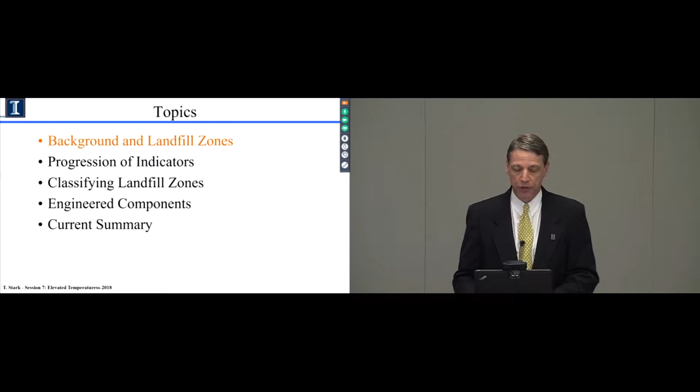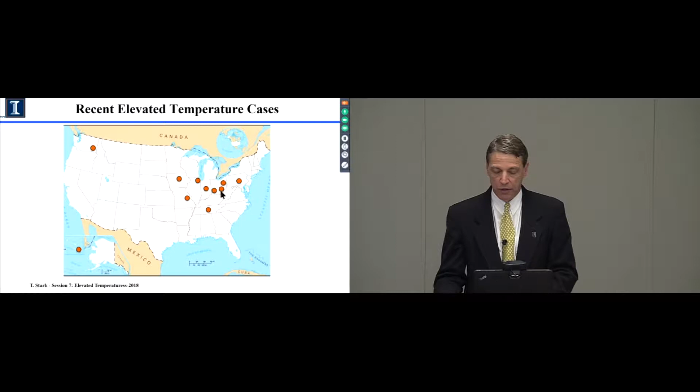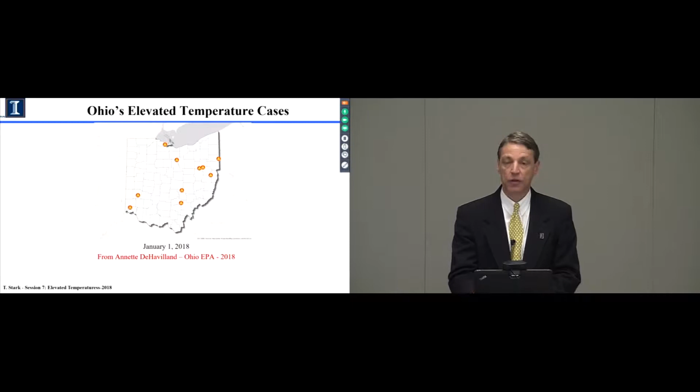The outline of the presentation is: the first topic is background on landfill zones and how big of an issue this is. This is a map I assembled previously that identifies the range of elevated temperatures in the United States, and recently I noted only 3 cases in Ohio, but the Ohio EPA produced a slide showing 10 in the state of Ohio, more than I had on my initial map. So it is a growing problem, elevated temperatures in containment facilities.

So what are some of the typical causes of these elevated temperature events? Some of those are pictured here in various ways. The first is air intrusion. Here's a cover system, and even though it's been repaired, you can see a hole right there in the cover system, the soil interim cover system, allowing air intrusion.

Gas well operations: this is steam or smoke coming through a final geosynthetic cover system on a closed landfill near a gas well operation, which was excavated and remediated. Incinerator ash arrives at the facility usually at an elevated temperature, and that gets confined in the facility and can lead to an elevated temperature event. Industrial waste of different flavors, the pictured one is aluminum production waste, and it could also involve shredded or scrap tires. Finally, C&D, construction and demolition debris type facilities, can also experience these elevated temperature events.

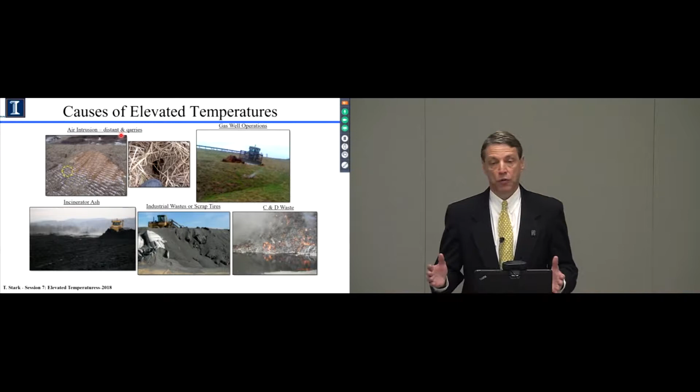I'll focus in on the next couple slides on air intrusion. These sources can be distant, not really close by. The picture I show you is fairly close by, but they can be fairly distant, and thus you're pulling in oxygen from a greater distance.

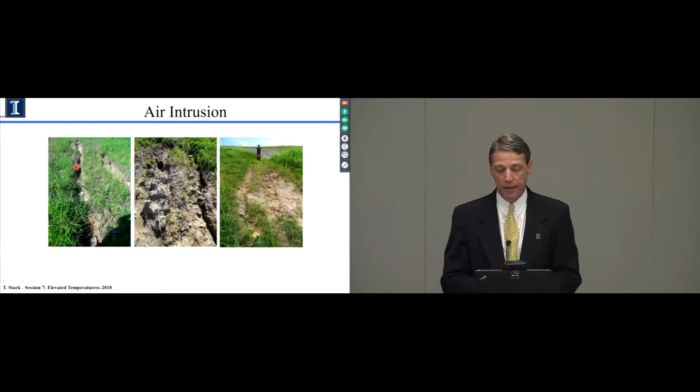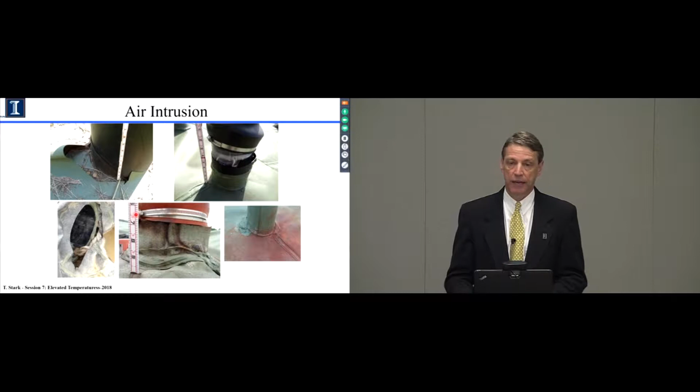Here is some erosion of the interim soil cover, exposing the underlying municipal solid waste, and that is a source of air intrusion. If the facility installs a geomembrane to control odors or just control the facility a little closer, making sure the geosynthetics are tight, and the geomembrane in particular, such as gaps between welds, extrusion welds, penetrations in the geomembrane, etc., is important, because there is a vacuum applied underneath this geomembrane, and if there are defects in that cover geomembrane, that can be a source of air intrusion.

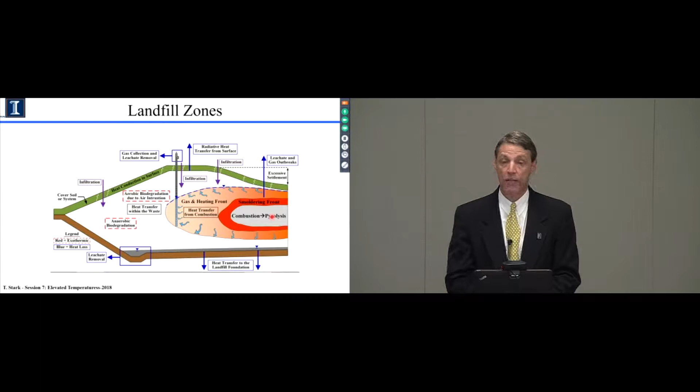So here are the main zones in a landfill experiencing such an event. We have a normal operation zone out in front, then a gas and heating front coming towards the normal material, a smoldering front, and then a post-reaction or combustion-pyrolysis zone behind that. I'll get into the specific features of each of those zones in just a minute.

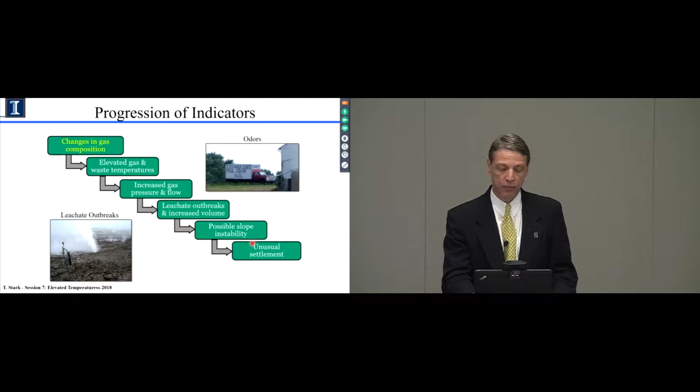So what is the progression of indicators? How do we know the facility is experiencing one of these events? Here is the timeline from the start to the finish of one of these events, with about six steps in this process, and I'll give you a summary of each. Generally, the first step is a change in gas composition, which can be readily detected if the facility is carefully tracking and creating trending graphs for various gases. The top graph is wellhead temperature, measured at the exposed wellhead.

You can see it's trending along fairly consistently below the regulatory value of about 55 degrees C, and then it picks up, as you see here, going forward. As that temperature changes, there are changes in the gas composition within the facility. The bottom plot shows the ratio of methane to carbon dioxide flow rate from a gas extraction well. You can see it's above 1, and 1 or unity is a very good number for that ratio, so it's tracking along above 1. Then notice right about 550 days, when the temperature starts increasing, there's a pretty quick and dramatic drop in this ratio of methane to carbon dioxide.

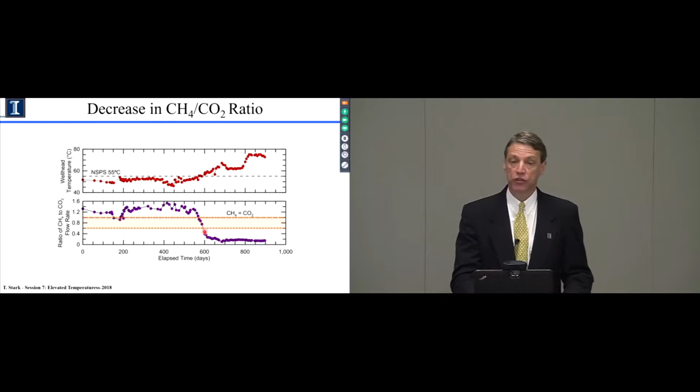Here's another parameter that's a good indicator of the gas front. Here's the graph I showed you on the prior slide of the ratio of methane to carbon dioxide. It's above 1 and then it drops quickly. This range from say 0.6 to 1 is sort of the transition zone, and that's why it's shaded. So below 0.6, there is some kind of reaction or event or significant change in gas composition that's occurring. The bottom graph is the carbon monoxide versus the same time scale at the same facility. You can see very low carbon monoxide up to about the same time as the decrease in the methane to carbon dioxide ratio.

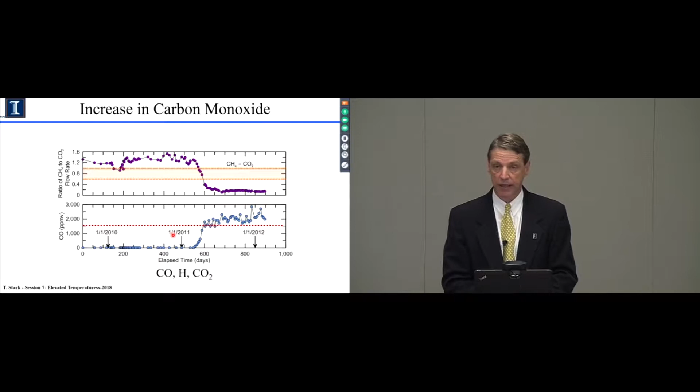Carbon monoxide is a good indicator. It's generally not measured initially, so that would be an additional measurement once you see the change in methane and carbon dioxide. A good number for carbon monoxide is 1500 - that's the red dashed line. Above 1500, that's a good indicator that there has been a significant change in the gas composition for the facility.

Here's some data from a facility experiencing elevated temperatures, and this gives you a picture of how you can track the movement of the elevated temperatures by watching the ratio of methane to carbon dioxide. Here's the graph starting. Notice that borings 1 and 2 are already exhibiting a very low ratio, much lower than unity, so this is an area of concern or reaction that's occurring. But now watch, B1 and 2 are over here on the cross section, and the other borings or wells are at or above 1.0, say about 0.8 to maybe 1.4. So the reaction or the change in gas composition has not occurred in these other borings, wells B3 through B6.

But notice as time progresses, right about here in 2011, there's a distinct drop, and this is in B3, B4, and B5. It drops quickly below unity, so you can see that the reaction has gone from B1 and 2 here on the left side over to 3 and 5 over in this range. So not only does it give you an indicator that an event is occurring, but you can also plot this trend in a plan view across the facility and see the direction of movement.

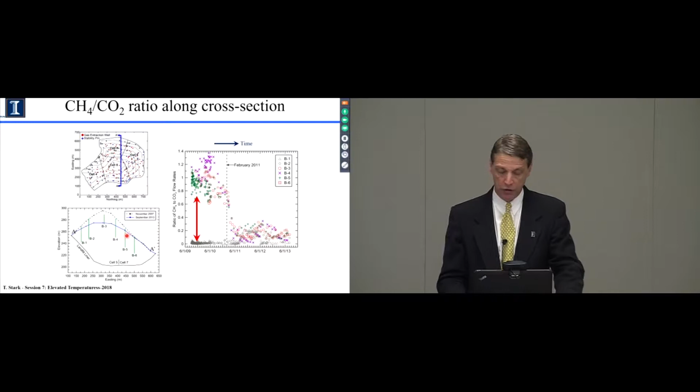That leads us to elevated gas and waste temperatures and the heating front. The wellhead temperatures now can be plotted on a plan view of the facility, and this graph in the upper left is April, December of the same year, so you can see the higher red color is higher temperature. April the following year, one year after the graph above, you can now see some very concentrated temperature zones on the order of 90 to 100 degrees Celsius in the wellhead.

And now in December of that year, it actually looks like it became a little cooler, and that's one problem with using wellhead temperatures - they're subject to ambient air temperature, so as the weather cools, it looks like the landfill is cooling a little bit. One other thing to notice is there are some blue circles here indicating cooler temperatures, but notice that they're very concentrated. What's happening there is the gas wells have a vacuum, cold air is being pulled in, and thus the wellhead temperature is decreasing. So in a plan view plotting wellhead temperatures, you can get a good view of what is happening within the facility.

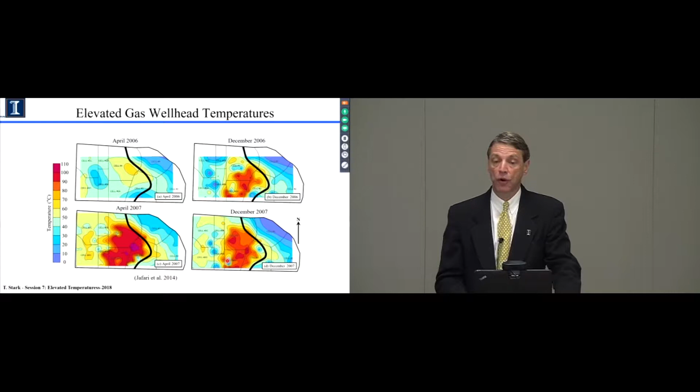And that's a good number if you're going to assess the facility and use wellhead temperatures. You need to add about 30 degrees Fahrenheit to get an estimate of what the downhole or waste temperatures are.

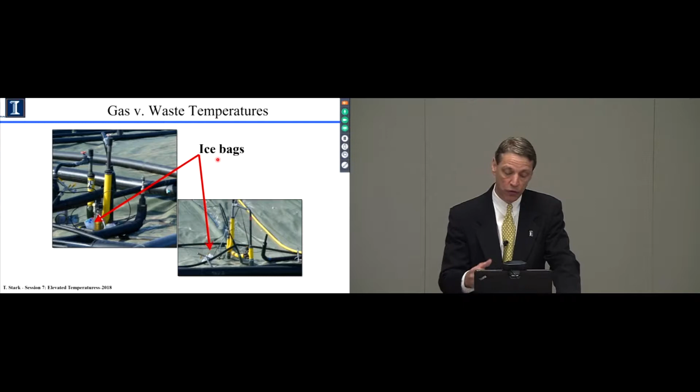Wellhead temperatures can be affected by ambient conditions, as I mentioned. As seasons change, the temperature changes, and it can affect the measurements. Also, the temperatures at the wellhead can be adjusted or controlled on the surface. If you wanted to cool the well to protect the well and the infrastructure, for example, you could put some ice bags on it and cool it down. So there are a lot of ways that the wellhead temperature may not reflect the downhole or waste temperatures.

The next is increased gas. So we've had a change in gas composition, a change or an increase in temperature, and now an increase in gas pressure and flow.

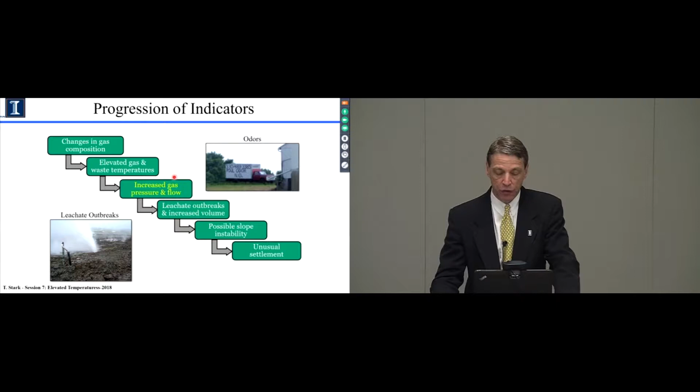So pressures in typical cases, say with biodegradation, a pressure less than 3 kPa. If there's an aluminum production waste reaction, it can be on the order of or as high as 45 kPa. And if there is subsurface smoldering, it can generate a pressure as high as say 75 kPa.

And the reason that pressure is generated is the ideal gas law. Going back to undergraduate chemistry, PV equals nRT. There are a couple other parameters here, but the two big parameters that are important in the equation are capital T, temperature, and on the other side of the equation, P, pressure. So anytime the temperature goes up, the pressure goes up in direct function to it, and that's how high temperatures generate these high pressures.

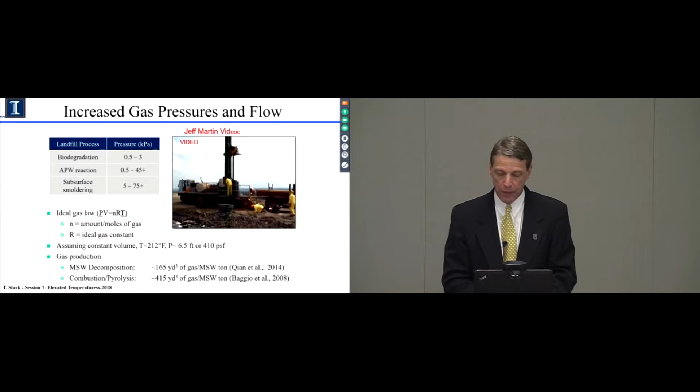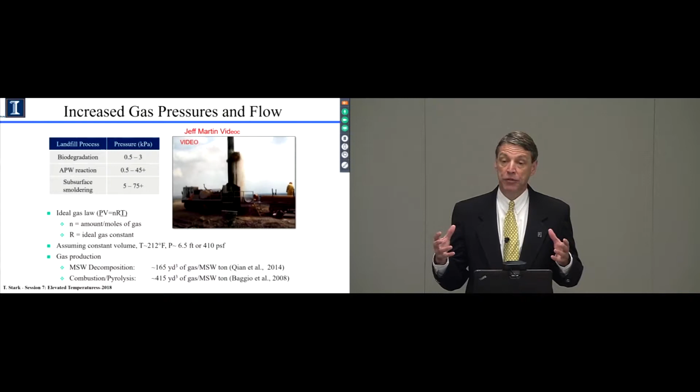So this is the drilling of a gas well, actually a slope inclinometer in a facility, and the drilling process is going, and that is leachate being shot out the top of the boring, on the order of maybe 20 feet high, because the high temperatures generate pressure, shooting the leachate out the top.

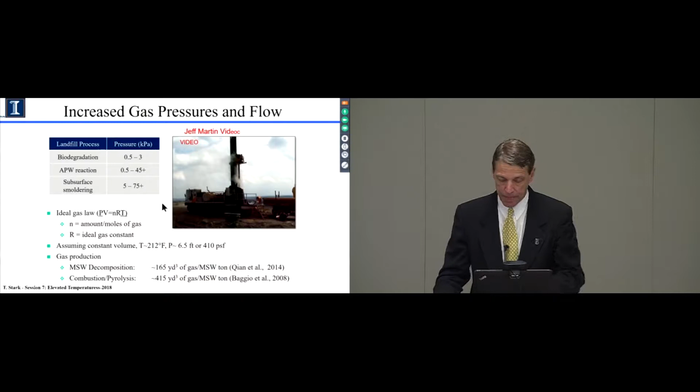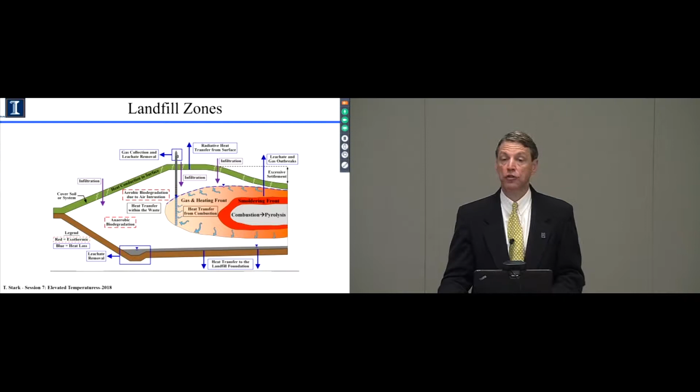Okay, so next is leachate outbreaks and the increased volume of leachate when these elevated temperature events occur. So this is the diagram I started with, illustrating the gas front, heating front, and the smoldering front of the landfill. And as that front moves closer to an exposed slope of the facility, such as here, the condensate or vapor condenses when it reaches the cooler area or the side of the landfill, and that creates a leachate outbreak right in this area.

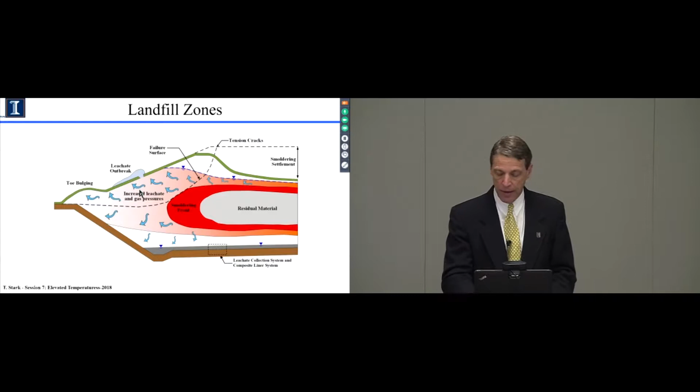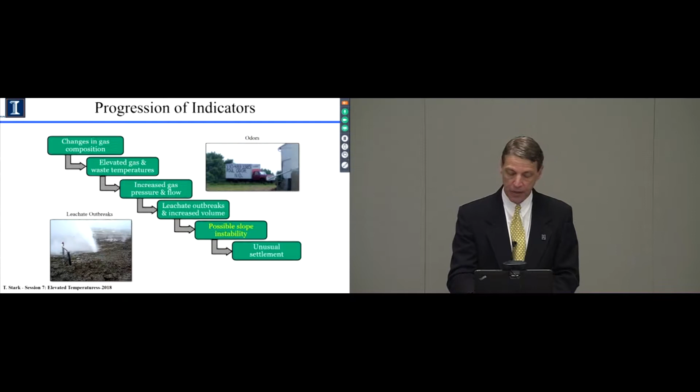It's important to monitor these cracks and make sure they're tension cracks instead of settlement cracks. Generally, the tension crack will reappear in the same location in a short period of time, maybe within a day or so. And if that does occur, that means the slope is moving fairly consistently.

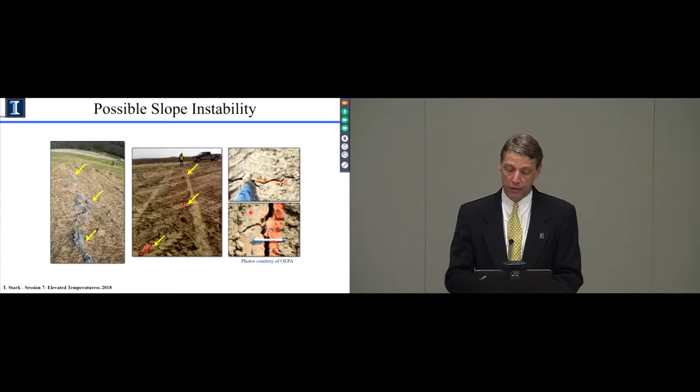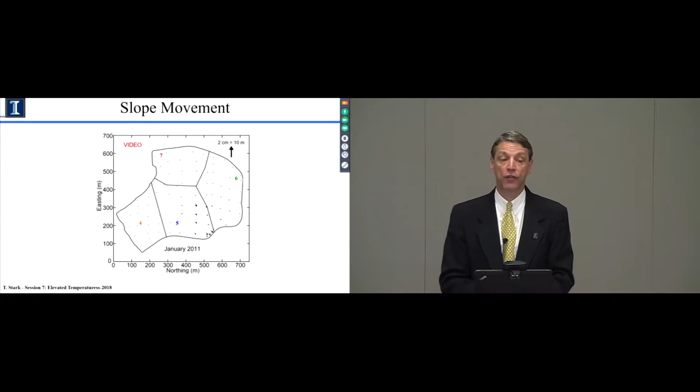So you can see that in this video. The elevated temperatures are going to start in cell 5, where my cursor is, and then migrate to the north into cell 7 and 6. There'll be little vectors that come on the screen that give you an indication of the movement. The longer the vector, the more movement that has occurred.

Okay, so there's July, September. You can see movement of the vectors here in cell 5. Now they're moving up to cell 7, pushing out, 2012, 2013.

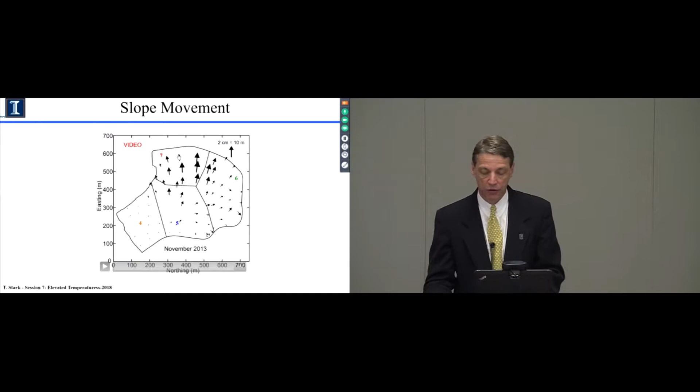Notice the vectors in cell 7 are getting smaller because the material is settling in, sort of like a souffle settling, and the slope is actually decreasing. But the pressure is pushing towards cell 7 and 6, moving the slope out.

That can all be included in slope stability analyses of the facility. Gas pressure can be estimated using a unit weight of gas of 12.8 newtons per cubic meter and a gas pressure head, and I gave you some typical ranges for biodegradation, aluminum production waste, and smoldering on a prior slide. But if you use 1 to 22 meters as the pressure head, you can calculate the pressure to apply in your slope stability analyses and check the factor of safety as a function of the induced pressure due to elevated temperature.

In this particular case, I calculated 22 meters times the gas unit weight to get 280. Here's a table that gives you a sensitivity of the factor of safety of the slope as a function of gas pressure. Initially there's no gas pressure, and the factor of safety is about 2.7, so stable. The MSW strength is still normal, but there's a high liquid level and a high gas pressure, and notice the factor of safety drops below unity - a quick drop in factor of safety.

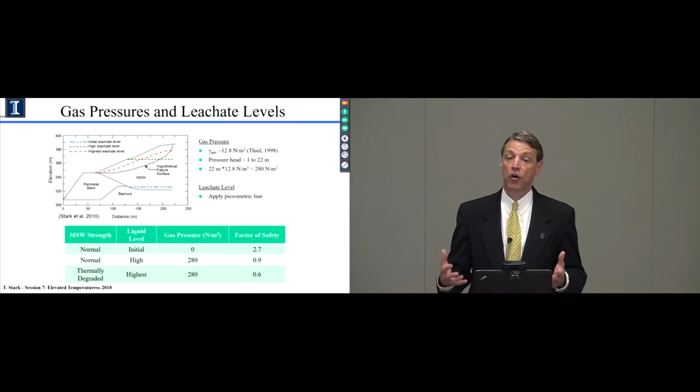Then if the waste is thermally degraded, which I'll talk about on the next slide, that leads to a reduction in the shear strength parameters, and you can see it drops the factor of safety even lower. So that can all be accounted for in stability analyses if you think stability may be affected by elevated temperatures.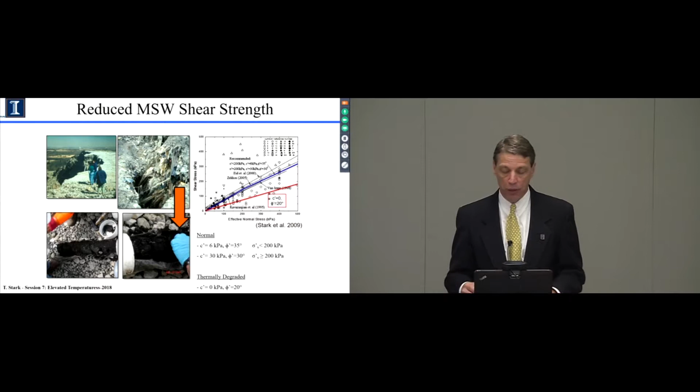The pictures at the top show a waste slide with a very steep scarp, stable because the material is acting like a reinforced mass, with high strength parameters for MSW. But you can see if it becomes thermally degraded, all that structure and interconnection of the waste is lost, resulting in a lower friction angle and no cohesion.

That brings us finally to unusual settlement. Here is a facility experiencing elevated temperature. The red line across the top is the original height of the facility, so you can see the reaction - an elevated temperature event has caused a significant decrease in the height of the facility, and you can see it's moving towards the right, where it has not been impacted.

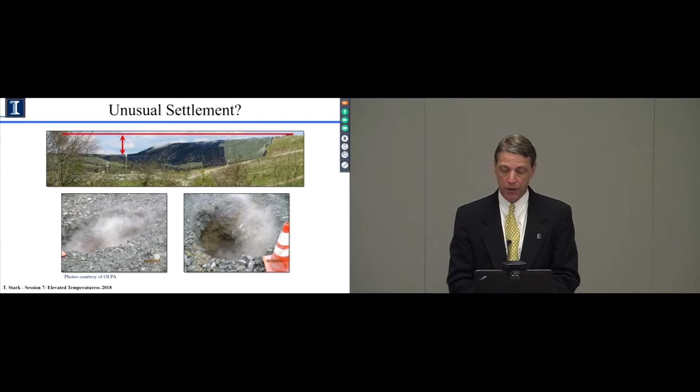As part of this settlement, you can get sinkholes, and this is a serious safety issue. The waste gets hollowed out below the soil cover, and it can be a real safety hazard in walking on it. It can also lead to gas wells being extended or left high in the air, such as these.

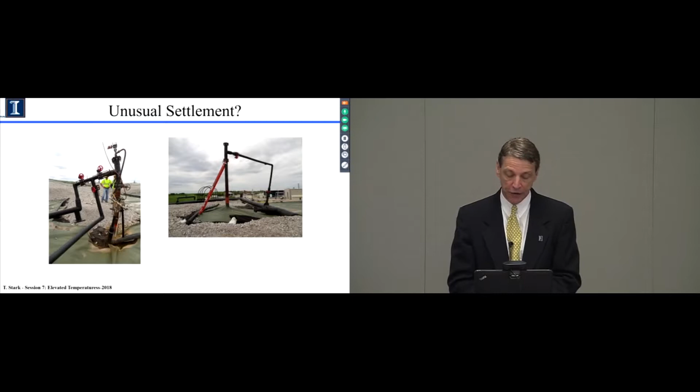Here is a video showing the settlement progression. This zone in the middle will grow - the red, increasing red color, is increasing settlement. This is sort of the settlement bowl dropping in.

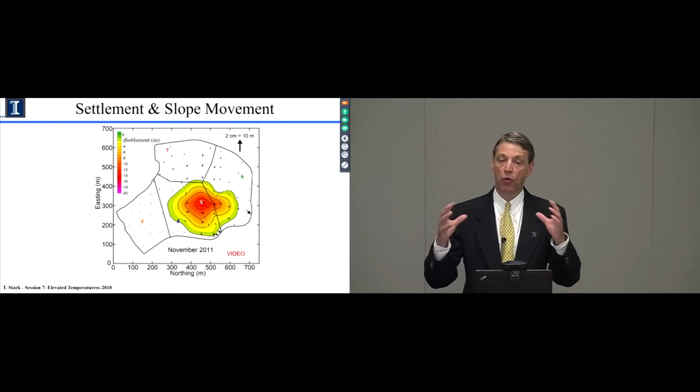So if the slope can withstand the high pressures being developed, eventually the slopes will flatten due to the extensive settlement. There's the settlement bowl - now there's settlement here in the middle on the order of about 20 meters.

One more important thing about the unusual settlement is the timing of it. This is really important for assessing where the elevated temperature event is occurring.

In that video I showed you previously, cell 4 is off to your left. It is not experiencing elevated temperature, and you can see a fairly consistent settlement with time of only about 1 to 2 feet per year.

But in cell 5, experiencing the elevated temperature event, you can see a very accelerated settlement on the order of about 18 feet per year.

Now the importance is the timing of this. This increase, this quick acceleration in cell 5, occurs at about 800 days. But the gas composition change I talked about in the beginning occurred at about 500 days. So almost a year later, the unusual settlement shows up.

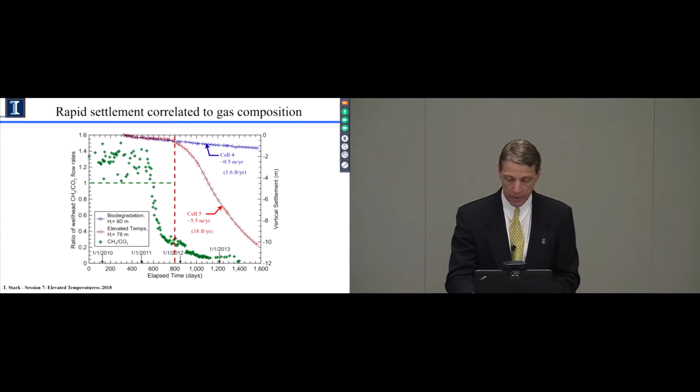Okay, so the next big topic is classifying landfill zones. How do we delineate the normal zone, the gas front, the heating front, and the smoldering or reaction front?

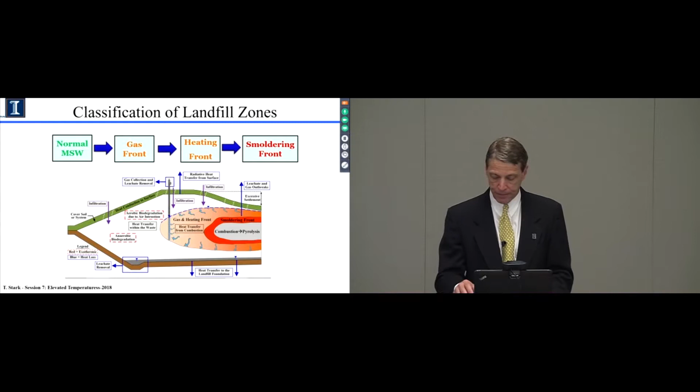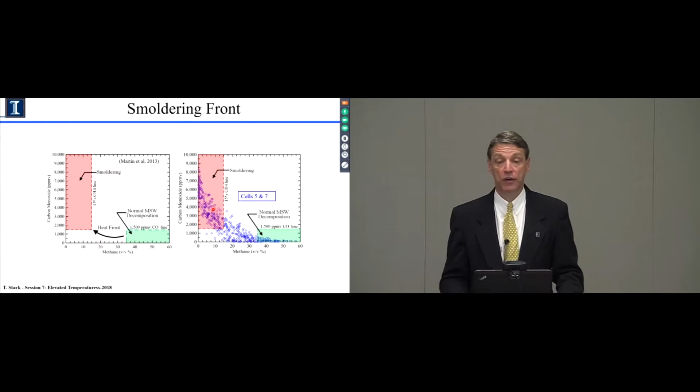Okay, so if I take the data from the facility I showed in the prior slides, cells 5 and 7—notice cell 5 is actually in the smoldering zone, while cell 7 is over here in the normal zone. As the heating front transitions from cell 5 to cell 7, as I showed with the vectors in that video, the gas changes—methane and carbon monoxide move into the red zone, or greater than 1,500 carbon monoxide and less than 15% methane. So that's all summarized here on this slide.

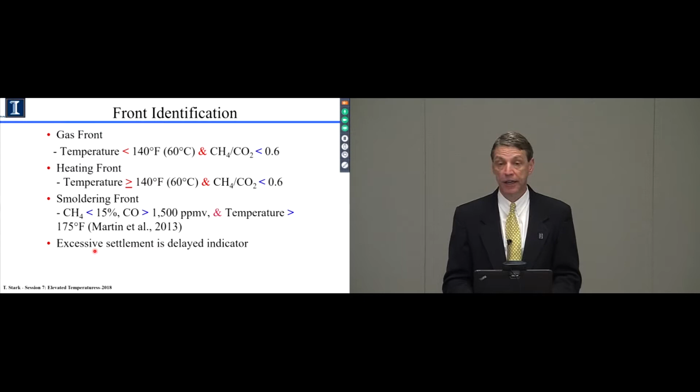The last bullet point is also very important. Excessive settlement is a delayed indicator - that is not where the elevated temperature event is currently located.

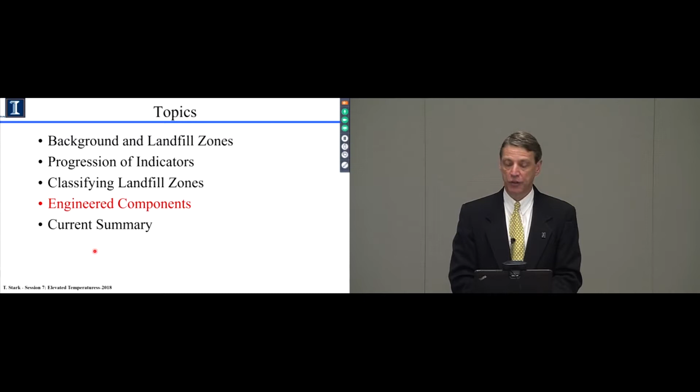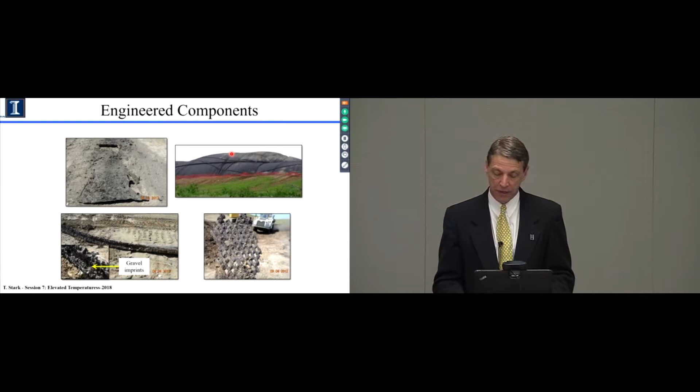So the service life of HDPE geomembranes in particular - and this relates to Kerry Rowe's first presentation - has 3 stages of service life: stage A, B, and C. You add those 3 stages up to give you the total service life. That can be reported in terms of an index property such as tensile strength, losing 50% of tensile strength, or, as Kerry Rowe focused on in his presentation, stress cracking and a significant increase in stress crack.

So the service life, we add those 3 stages together, and I'll show you that on this graph on the right, and it's all based on the OIT, or oxidation induction time. Stage A, B, and C are added together, and the total is the squares here - that's the service life. The important thing to notice is the dramatic drop in service life as the temperature increases with time.

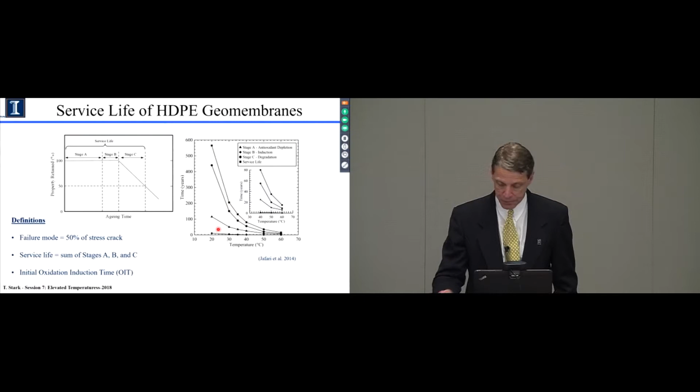So the big question is, how much temperature do the geosynthetics feel in the facility, and for how long do they feel it? If it's just a short period, maybe it's not a big effect on the geosynthetics, but if it's sustained heat over a long period of time, it can impact the geosynthetics.

Here's the time versus temperature plot for a facility, detected by measuring temperatures in leachate collection pipes. Notice part of the facility remains at a fairly elevated temperature, 80 degrees C. But another part of the facility initially was not experiencing elevated temperatures - for about 2 years it hovered around 45 degrees C, but then after about 2 years you can see a quick increase, occurring within half a year to a year. So that's how quickly the temperatures can develop, and now the temperature is hovering about 60 degrees Celsius.

This is important because if you conduct laboratory tests, as Kerry showed earlier today, you need to apply a temperature time history to the geosynthetics to see what the impact is on their long-term performance.

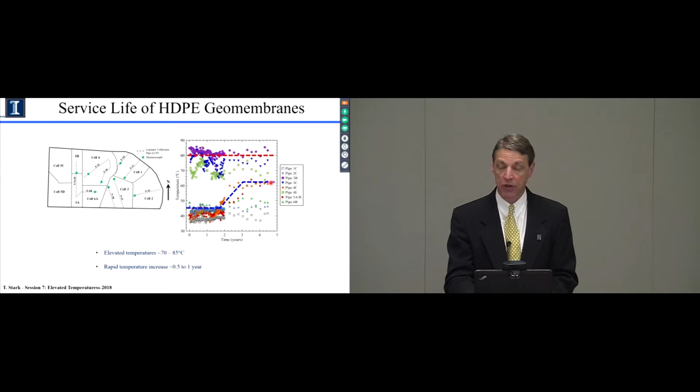So here is a temperature time history for one particular facility. Here's the initial landfilling. Some biodegradation occurs, so the temperatures increase a little bit to 115 degrees Fahrenheit. They remain constant, and they should remain constant, unless an elevated temperature event develops. Notice in this particular facility, an elevated temperature event did develop.

It was a reaction, a metallic reaction. It quickly increases up to 175 degrees Fahrenheit, and it's maintained there for about 5 years. So if you wanted to simulate that in the laboratory in a liner simulator, you would subject the geosynthetics to about 5 years at 175 degrees, and then you can see it cools fairly quickly. Then you could assess the impact of the elevated temperatures on the geosynthetic's performance.

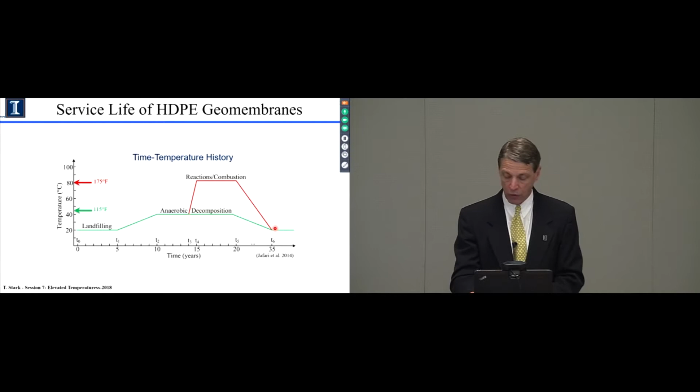So if I use that time history and data produced by Rowe and Islam, using an immersion test where the geosynthetic is immersed in a solution - so both sides of the geosynthetic are subjected to the elevated temperature - here's stage A, B, and C, and if it has a low temperature, you would expect a long service life, say hundreds of years.

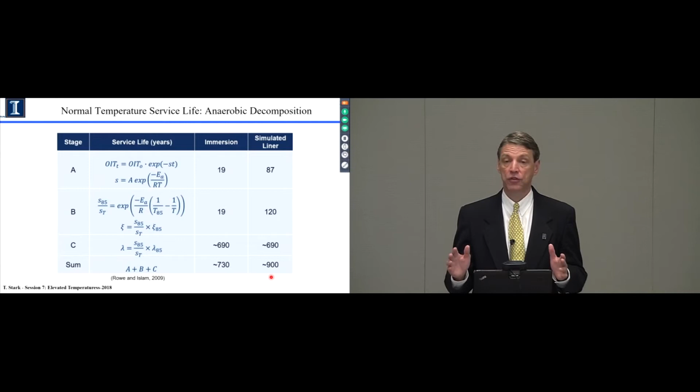Even in the simulated liner that Queen's University developed and are currently using, where the elevated temperature and leachate only touches one side of the liner system, notice the stage A, B, and C increase, and the sum, or total service life, increases to about 900 years. So it looks really good - these are under normal service life temperatures, less than 55 degrees C.

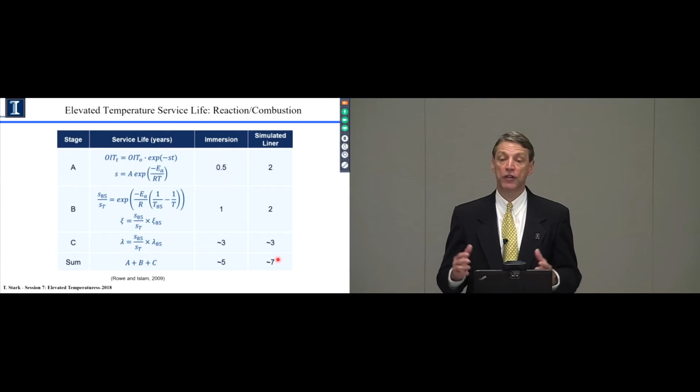But if elevated temperatures do develop, such as I showed, 175 degrees Fahrenheit, now if immersion is used for the test procedure, you could be on the order of 5 years instead of hundreds of years. And if you use the simulated liner test developed at Queen's University, you're still less than 10, about 7 years. So a very dramatic reduction in service life of the geosynthetic with elevated temperature.

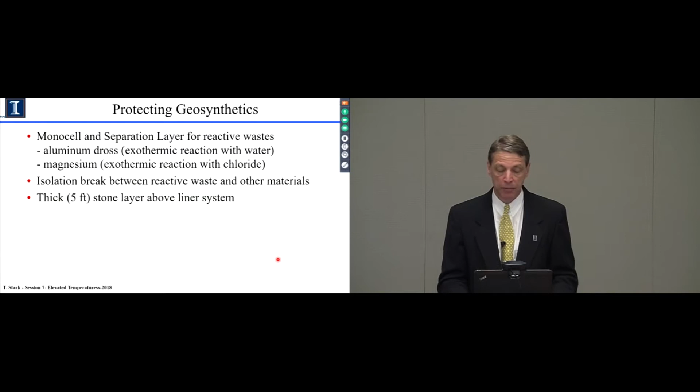So how do we protect the geosynthetics from the elevated temperatures? Some operational and design techniques to do that: use a monocell, put the high temperature waste or waste that can potentially react in a monocell, and have a thermal barrier or separation layer between that and the other parts of the facility. So if an elevated temperature event does develop, it's isolated to a contained area.

Waste that could be isolated includes aluminum production waste, magnesium type waste, and other waste that undergo reactions. An isolation break between the reactive waste and other materials can be used if the facility is already in operation, or during construction, just leave an isolation break between the existing facility and the lateral expansion.

Finally, a thick stone layer along the bottom serves multiple functions. One is leachate collection, but it also provides a buffer and a cooling zone between the geosynthetics and the waste. However, a stone layer is also a potential pathway for air intrusion, which could also contribute to the elevated temperature event. So that's a catch-22.

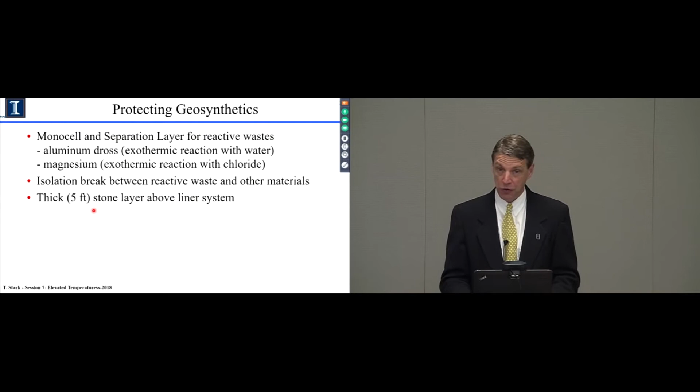So how can we utilize geosynthetics in these elevated temperature events? One key use is to cover with geomembrane, and I showed some photographs of facilities that have used geomembranes to cover these elevated temperature events. They help control the odor, and allow us to increase the vacuum underneath these geosynthetics and collect the gas and the high temperatures, removing it from the facility.

They decrease infiltration, which could contribute to the reaction in some cases, and the increased vacuum helps remove liquids as well. But again, that's a catch-22, because if there's a high vacuum on the wells, there's a potential for additional air intrusion into the facility.

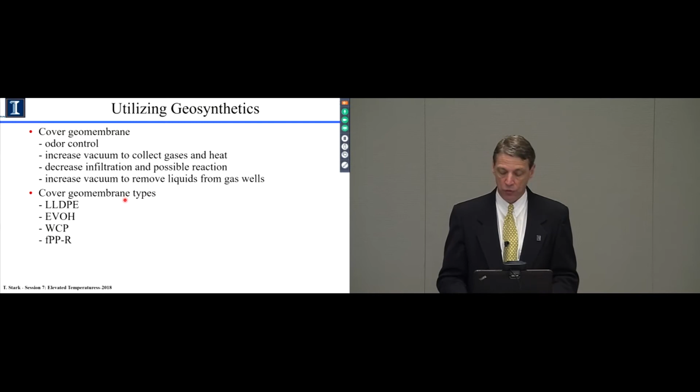Some of the geomembrane types that can be used for the cover geosynthetics or cover material: LLDPE, EVOH, woven coated polyethylene, flexible polypropylene reinforced, to give it some support. Here are some photographs of an odor control cover, or temporary geomembrane, on a facility experiencing elevated temperatures.

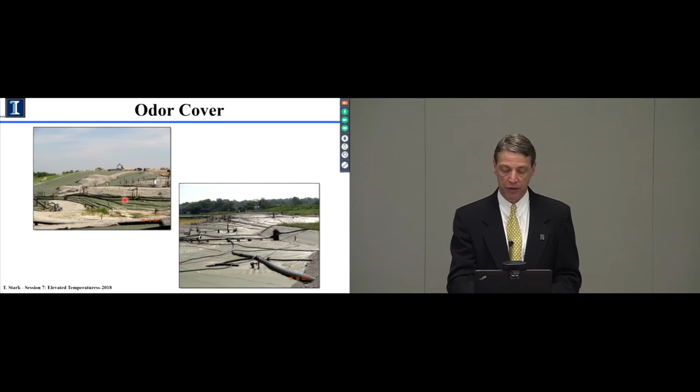So, in summary, the landfill zones: there are 5 main zones: normal operation, the gas front, the heating front, the smoldering front, and then the combustion/pyrolysis area or zone behind that.

Gas wellhead temperatures can be a good indicator of what's happening in the facility, especially to plot the changes in temperature with time, but it should always be remembered that those gas wellhead temperatures are generally 30 degrees less than the downhole temperature. The gas front can be delineated by a temperature less than 140 degrees Fahrenheit and a methane to carbon dioxide ratio less than 0.6.

The heating front has a temperature greater than 140, with the same ratio of methane to carbon dioxide. And the smoldering front is delineated by the 15-15 graph: methane less than 15%, carbon monoxide greater than 1,500 parts per million, and temperature greater than 175.

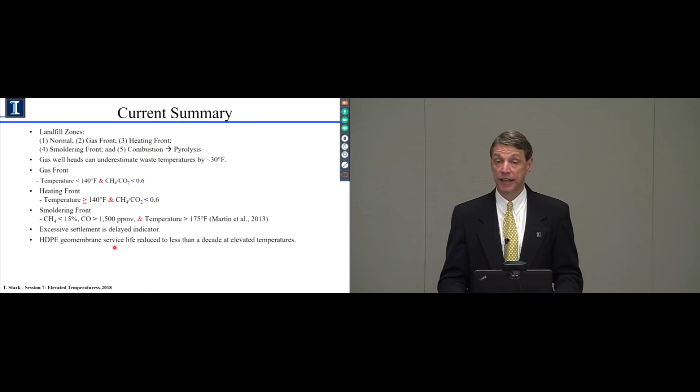Excessive settlement is the aftermath of an elevated temperature event. It's not an indicator of where the elevated temperature event is occurring. And finally, the service life of geosynthetics, and in particular HDPE geomembranes, can be reduced significantly to even less than a decade in the presence of elevated temperatures.

With that, I'd be happy to try to answer some questions. Andy? Yep.

All right, I got a couple questions here. First of all, what about possibly constructing a landfill below the ordinary high water table, groundwater? Would that be considered a method to kind of keep it cool? That was an online question from Mick Leet.

Well, it would be cooler. I'm not sure how you could permit it below water. If it's an inward gradient site, water could come in, but I don't know if a state would permit that, being below water, and dumping the waste below water. But you don't remove it, you don't cure it, you don't solve the problem.

So you're talking about 140 degrees Fahrenheit at the surface. Some of the surface temperatures you're seeing are greater than that. That's an excellent point, Andy. That 140 degrees Fahrenheit and the 175 I mentioned is a wellhead temperature, not a downhole temperature. So even though we're talking about 140 degrees Fahrenheit, it's 170 at depth. I forgot to emphasize that point.